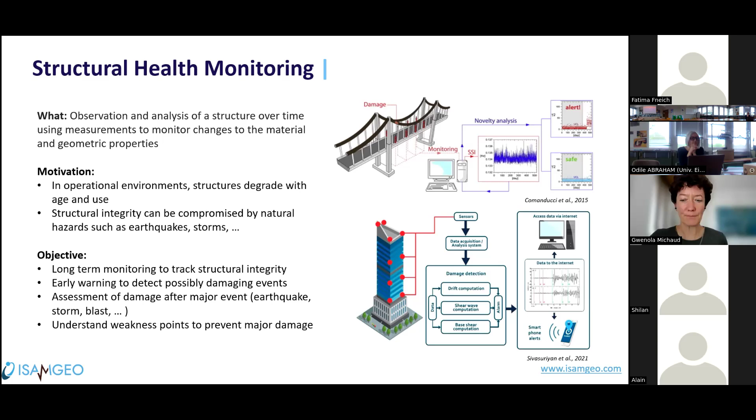So it's important to understand how a structure would behave based on a dramatic change or displacement occurring on the ground of this structure. Some recent examples: last week, we have all seen these dramatic pictures from Taiwan, where an earthquake of magnitude 7.4 hit. We now have pictures in our mind of buildings collapsed, buildings tilted, but also this Taipei building, very tall, which has been able to stand still thanks to a pendulum.

So we can see that structures are not equal because of their structure, the way they have been built, the elements which compose them, but also because of the interaction with the ground they are built on. And this, of course, has different types of consequences.

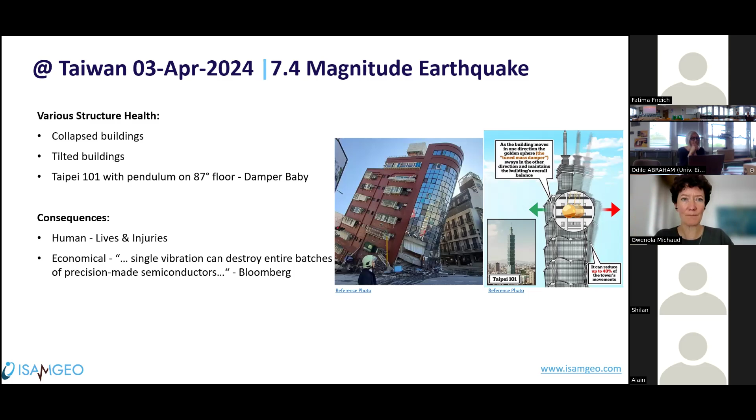Closer to us, we have Turkey. Turkey is also a very active place in terms of earthquakes. And because of the energy distribution across Istanbul, there's a need to store liquefied gas in these spherical containers. And these spherical containers could be a potential threat during earthquakes.

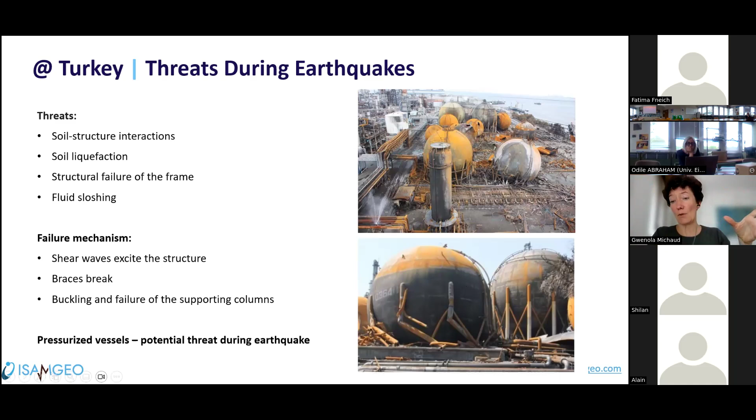And here are some pictures where we can see, and we will see this in the presentation, the braces here, maybe you see my mouse. You see that these metallic braces supporting the vertical columns tend to fail. And when they fail, the columns just bend and the entire container just drops. And this picture is quite interesting because you can see that one was holding still on the right while the other one just collapsed.

So how do we analyze the operational mode of the building? Basically we are combining measurements of the acceleration or velocity of the ground and of the structure. And by integrating these measurements together, we can compute the frequency response of the structure. From this, we can estimate some parameters, and here we are mostly concentrated on the frequency peaks of the data.

By observing these frequency peaks and comparing them with the estimation made by the model, we can update or confirm our model of a structure. And through the modeling of a structure, we can see which elements are more resistant, more compliant, and the ones which may need some attention.

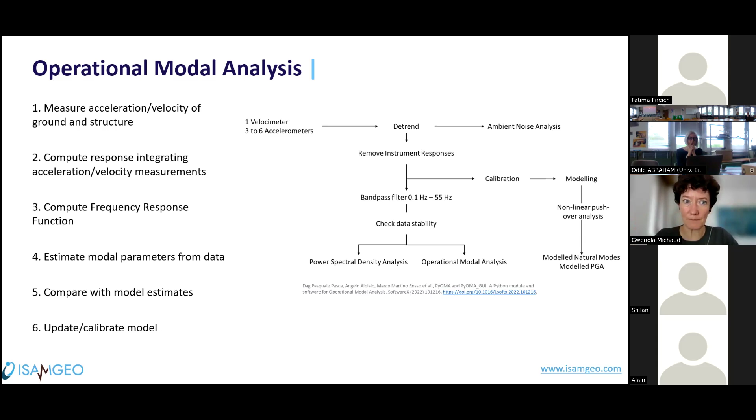Do you have any questions at this stage?

No? I will move to...

Okay. So let's move to the first project. The first project is based on this spherical vessel, this tank. This data has been recorded in November. And what we put is only 4 instruments. We put 1 velocimeter here on the ground. And we put 3 accelerometers on the structure, 2 on the equator of the structure, and 1 on the top of it. And we measure for nearly 1 week this activity of this tank.

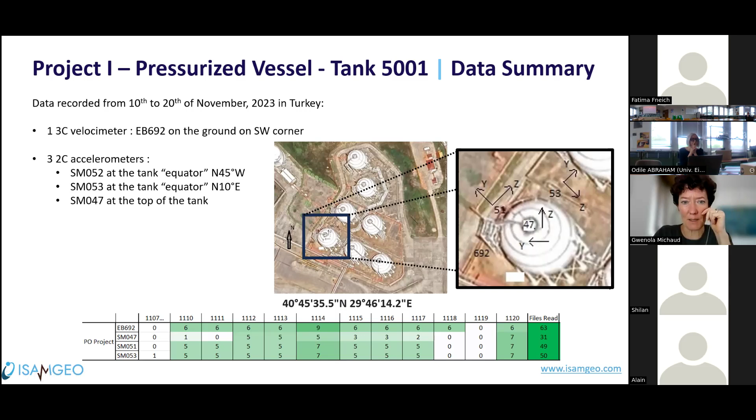Here are some pictures where we can see the spherical tank close by. We can see as well the column, which is basically supporting this big sphere. We can see as well here a small beam on which one of our instruments will be installed. And here we see the 2 braces supporting 2 out of the 12 columns. And on the top here, on this plate, another instrument was put.

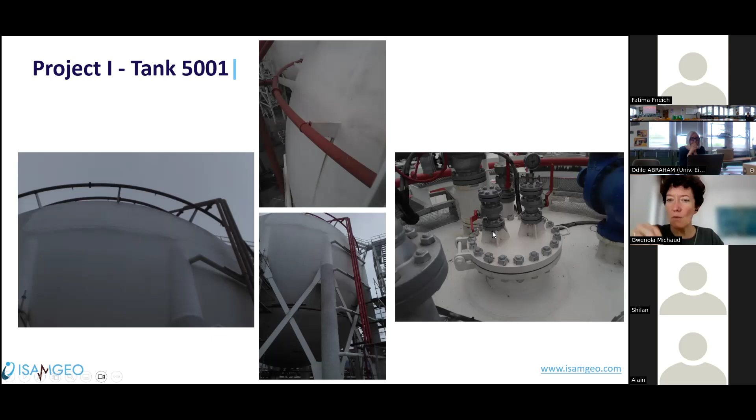So let's look first at the measurements on the ground. By putting a sensor at the ground, the objective here is really to measure the input of a vibration to the structure, because there's some ambient noise. So let's make a parenthesis on noise. What is a noise? Here, noise can be seen as a signal as well, but we call it noise because it has not been created intentionally, okay? But it constitutes a vibrational input to the structure. And it's interesting to measure this noise, because maybe we could imagine that this noise is constant over time.

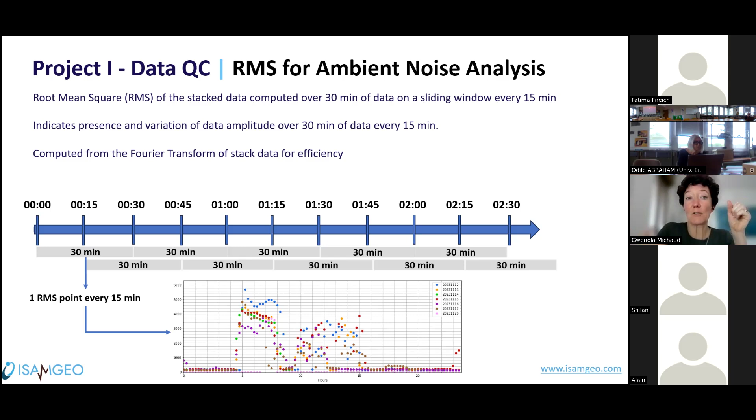The other information here that we see, on the 2 accelerometers on the equator of the sphere, show the same type of information. We see in the morning, in the night, low amplitude. As the activity on the site picks up, we start to pick up more amplitudes, not only on the site, but as well on this structure. When the activity stops, maybe for lunch break, then the activity stops. And in the afternoon as well. And then after the office hours, we are back to this background level.

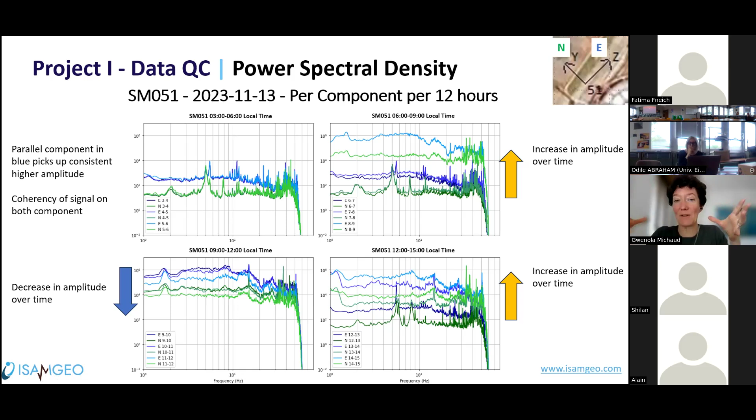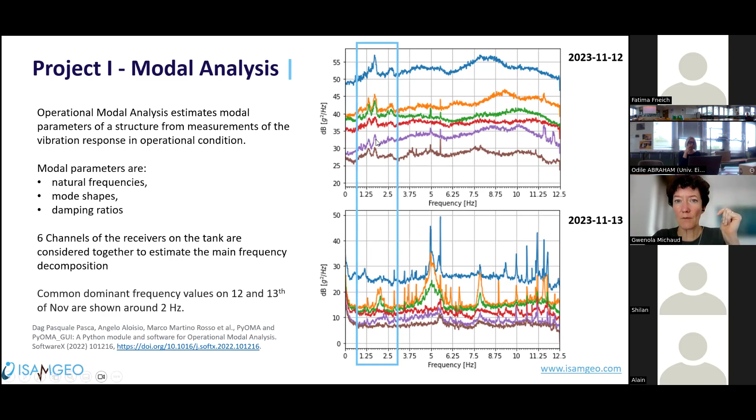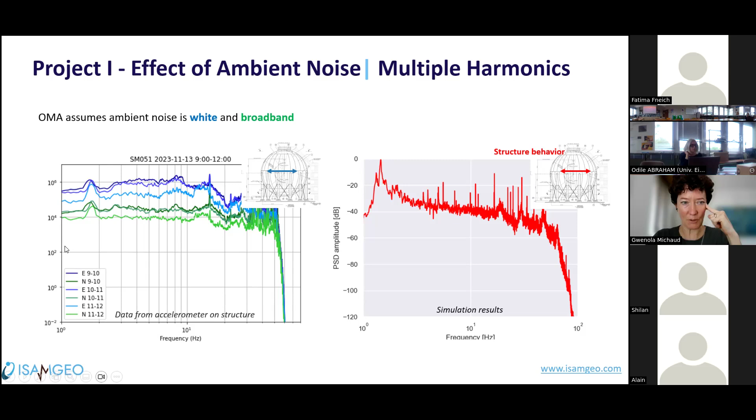So here again, this spectrum is associated to the accelerometer on the structure, which presents some frequency peaks. And here we see the results of a simulation where we have this peak of frequency and other frequencies which can be observed. When we compare the model results on the right with the observed results on the left, we start to see some correlation related to this peak really between 1 and 2 hertz. So looking at this singular value decomposition and the data, we see some correlation between what we observed in the data and this frequency domain decomposition, where we see a peak at 1.4 hertz.

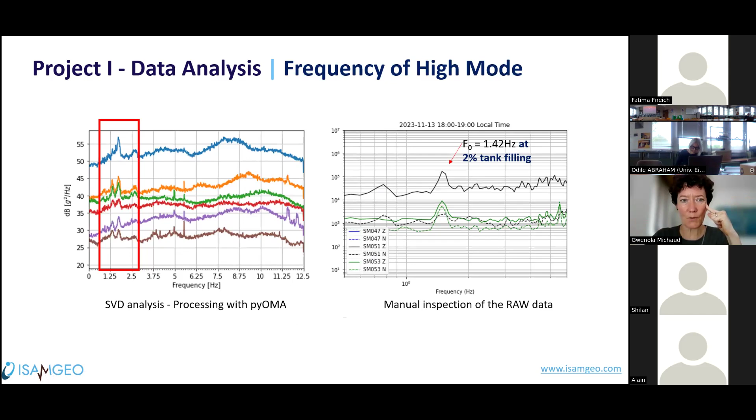The question we asked is: is this mode, or this frequency peak, always visible? And the answer is no. Unfortunately, when the tank, for instance, was full at 11% at this hour, which is between 4 and 5 o'clock, where the noise was relatively high, we were not able to see this peak. So when the noise level is too high, it looks like this mode is hidden. An hour later, when the tank was full only by 2% and the noise level was decreasing, we were able to see this peak again. So it looked like there's a limit on the noise floor which makes us see this mode or not.

When we waited for another hour, when the noise floor was lower, we were not able anymore to see this peak as we thought. And our explanation is that the energy of the vibration at that time is not sufficient to trigger the mode. Why? Because after this activity hour, there's not enough ambient noise to create this input signal to the structure and to make it vibrate at this frequency. So what we see is that there's a kind of trade-off between ambient noise being high enough to excite the structure, but not so high that the noise level would mask this oscillation peak.

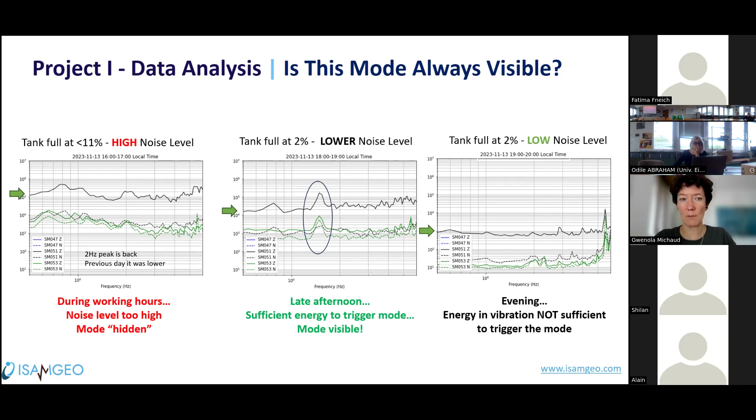So let's see on the modeling side. To model, the structure is quite complex, meaning that it's composed of different elements. And here there's a choice. We are not going to measure every single element of this body. We are going to simplify it, and how we simplified it,

we consider the model with 12 columns with a certain height. We consider all these braces, which are basically linking these columns. And instead of this big sphere, we considered a lumped mass at the center of a rigid diaphragm. So a kind of a plate, if you want, but it's more flexible than a plate. It's really a diaphragm, with some rigidity, placed on the top of these columns.

So basically, the way to simplify this structure, which looks complex, is with 12 columns with braces and a diaphragm on which we put a lumped mass. This lumped mass is able to move in 3 degrees of freedom: on the 2 horizontal axes, and as well with a rotation around the vertical axis. Okay.

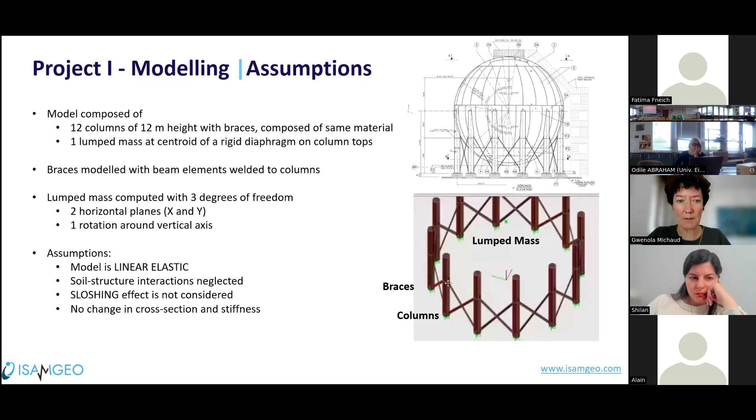And we made some further assumptions associated with the modeling aspect as well. When we did the modeling, the result was that for the same tank filling, which is 2%, we observed a frequency at 1.4, and this corresponds to what we observe here on the data.

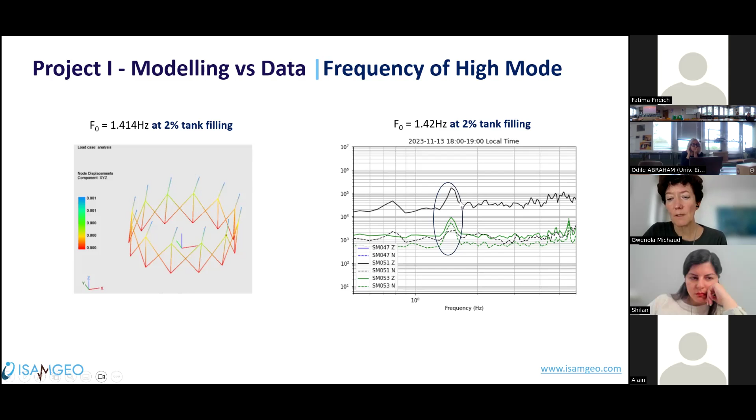So this small project has been quite interesting for us because it's a way to illustrate the fact that we can use ambient noise as input to understand how a structure can vibrate. What we observe is that this vibration mode is not always visible. It needs a surrounding activity high enough to generate vibration on the structure.

However, we need to be careful that too high a noise level could mask this peak, because this peak is not of too high amplitude. However, there's a good match between the observed and the modeled frequency. What we did as well was to check how the frequency of the oscillation on the first mode would behave as the tank is filled. Here we observe 1.4 hertz when the tank was filled at 2%, which corresponds to the modeling.

However, if we fill the tank, then this frequency would go to a lower frequency. And this is maybe one of the reasons we were not able to see it when the tank was filled. Another explanation is that we were able to see the tank getting empty, but we were not able to measure when the tank was getting filled.

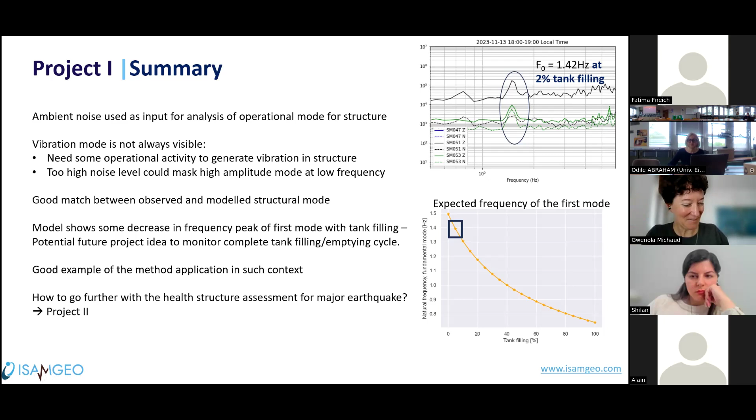Because they are across Istanbul, and critical because they are industrial buildings which basically compress or decompress gas for the use of people around. We monitored 20 buildings on 9 sites. 3 sites were on the Asian side and 6 on the European side. And these buildings were categorized in two ways.

Administrative ones, which is basically this kind of building here, a square type of building, which is quite strategic because this is where there are all the commands for stopping, closing, or opening valves in order to stop the flow of gas.

And these RMS buildings, we are calling them RMS buildings, don't ask me what the acronym is for, are basically composed of all the instruments the operations need to distribute and to compress the gas. So here you can see that some pipes are coming in, some pipes are going out. These buildings usually have an internal anti-blast wall in order to separate the building and protect one part of the building if there's an explosion.

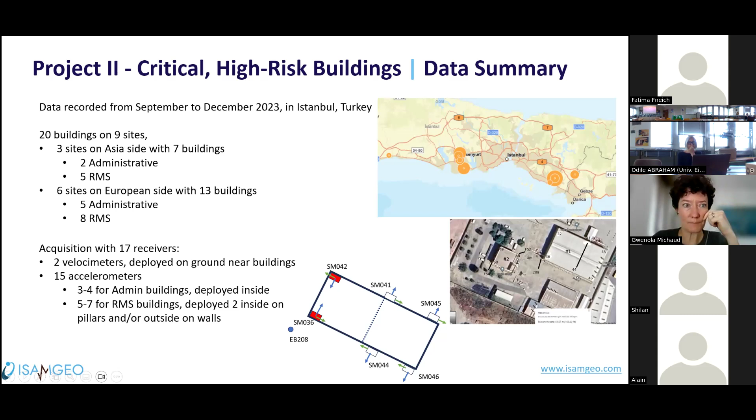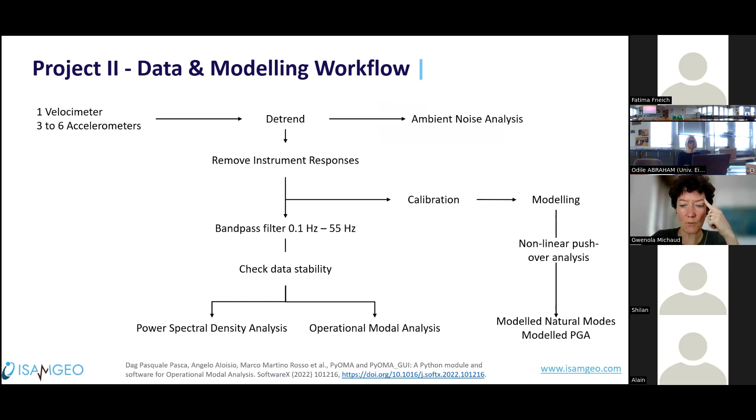So we follow the same process as before. We did ambient noise analysis and power spectral density analysis, the operational modal analysis, and then we compared it with the results on the modeling side. So let's take one example that has been recorded in October, over 1 week basically, with one on the ground and the other 6 across the building.

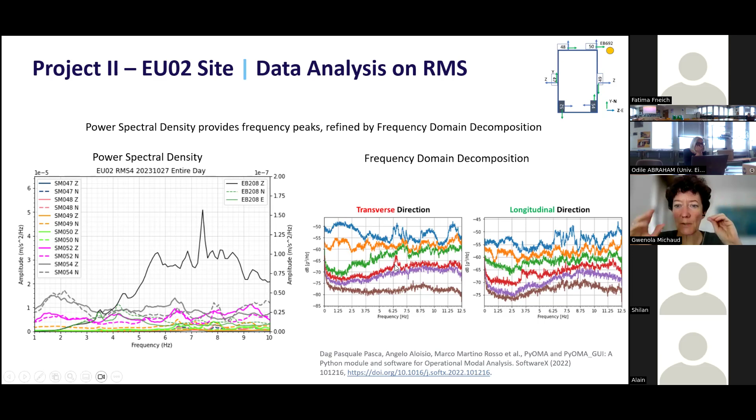So coming back to the data analysis, we can see that on the power spectra, we start to see some peaks as well on the different components. Looking at the frequency domain decomposition to understand in which direction the movement tends to be, it seems that there's more movement in the transverse direction of the building at lower frequency, but this graph is relatively difficult to interpret because there are many peaks for this specific building.

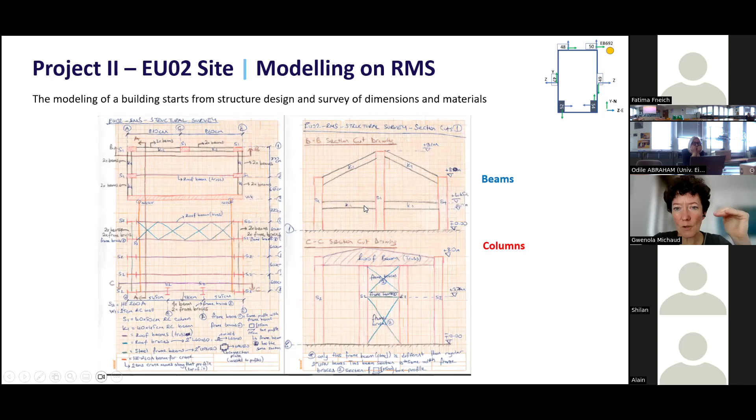When we started the modeling, we took into account all the structure that was made available for us at that time. We consider the beams as this metal frame on the rooftop and across the columns which are in red. For the finite element modeling, we then constituted all these elements to create this model for the entire building. And we separated 2 parts: the part associated to the metal part of the building, which is in blue here, and the other one, which is associated to this reinforced building, including the anti-blast wall, which is basically touching this part of the building. So 2 parts of the building.

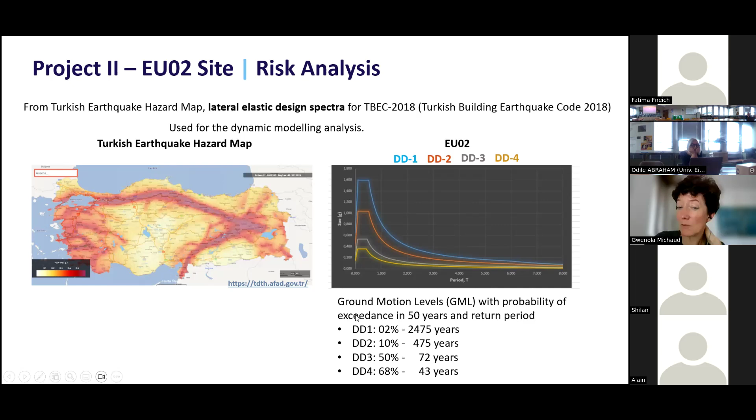Through this modeling exercise, what we have is we superpose this spectrum that we extracted. So here, these three first spectra are the spectra that you see for three, two, and one type of earthquake with different types of growing amplitude. And against it, we put the capacity curve that was estimated for this part of the building.

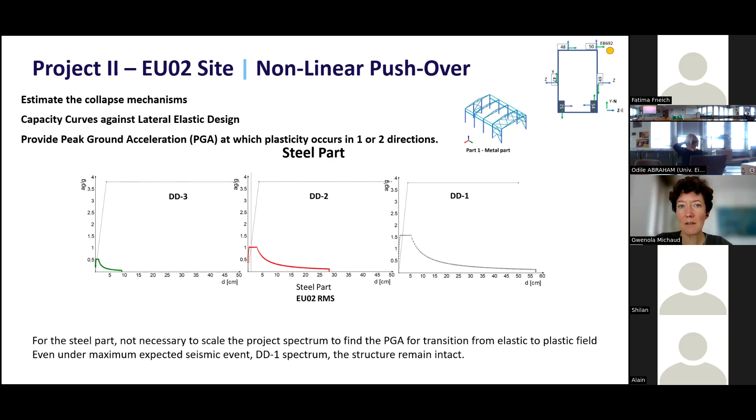So for the metal part of this building, we have capacity curves which are basically exceeding the lateral elastic design spectrum. So what does it mean? It means that for this part of the building made of metal, the building will be able to stand and remain intact in case of a major earthquake.

So this itself is quite interesting. Further, because we included different types of elements in the modeling, we are able to understand where and the type of failure which could happen in this part of the building. So all this information is provided to civil engineers, who are then able to understand how to define plans in order to better protect this part of the building.

So this is what I wanted to provide you as a second example of this type of study. Do you have any questions?

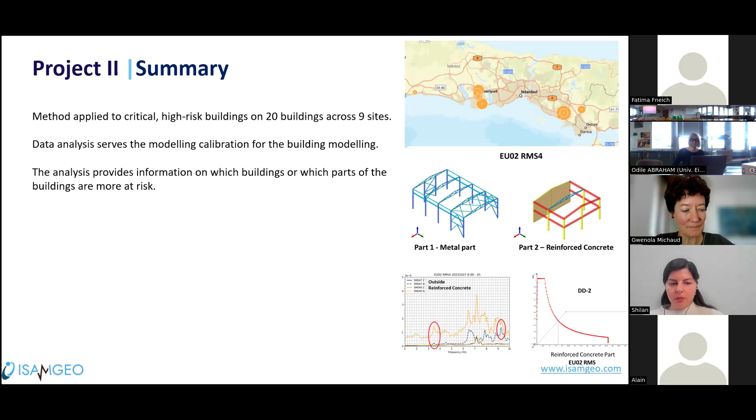I have a small question. What finite element modeling software do you use? Yeah, that's a good question. I don't have the name myself. It was one of my colleagues who did it. And yeah, I should know it. I don't have it here with me. It's fine. Thanks for the question. Next time I will have it. It's fine.

For me, I would like to ask, how do you choose the sensor position? Is there a pre-modeling before? Yeah, that's a really nice question. So the criterion has been to have sensors inside and outside. And inside, I think it was associated to the frame and to the accessibility. So they were able to put it on the steel frame inside.

I can hear some noise. I wonder if someone wants to talk.

And then they did it for the first building, and then they started to apply the same methodology on all the buildings. And then for the outside, it was basically on the corner. The idea was to make sure that they can record at the corner, because we thought that the oscillation would be larger at the corner, and here in the middle, because it's close to the anti-blast wall.

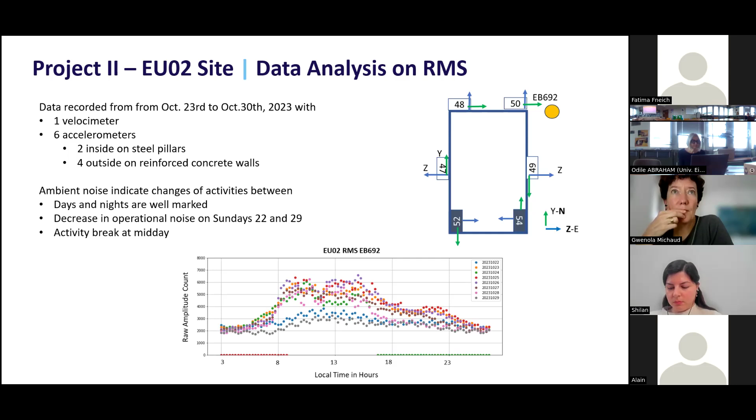Nadine, you have raised your hand. Yes, basically, in one of the slides, you say that you could not measure all of the modes. You match them up, right? The theoretical with experimental? Yeah, that one. So when matching them up, do you use the mode shapes, or how do you match the observed to the modeled ones?

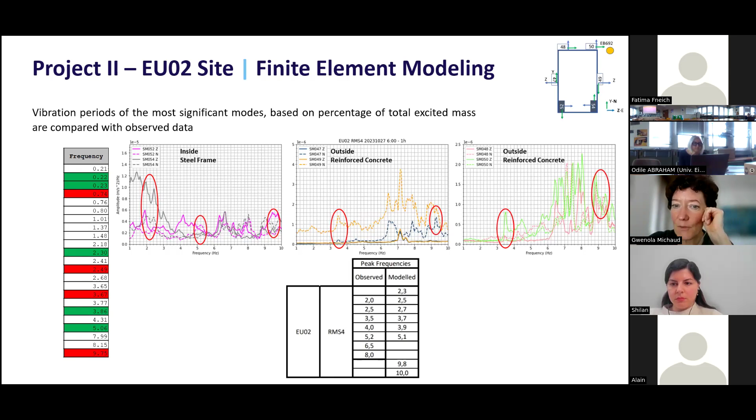That's a really good question. Thanks for this. And you're right. I looked at the peaks, but it's only a really first analysis. But what would be very interesting, as you see, the peaks are of different shapes. So I'm sure there's some information here which could be extracted more than just that.